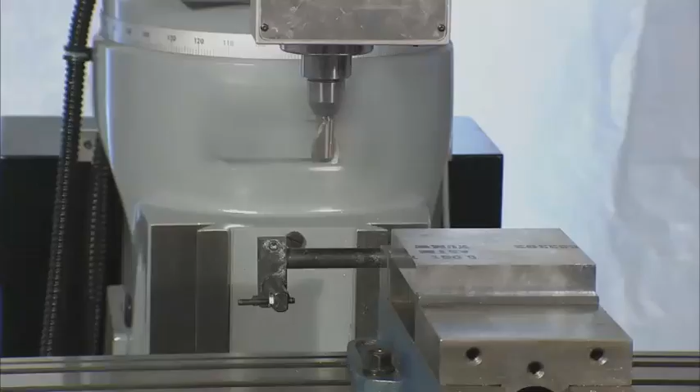It is always recommended to do a reference search when you first power on your machine. From the main jog screen, press the reference key. You will notice that a menu appears prompting you with possible options. Press the cycle start button to continue the reference search on all axes. Press the escape key at any time to cancel.

Another way of doing a reference search is to press the X key. Now press the reference key, followed by the cycle start button. This method allows you to reference search one axis at a time. You will need to repeat the process for all remaining axes.

Now that machine reference is complete, let's review our demo part print, required machining operations, and tools needed to program the demo part we have selected for this video. Please note, in our demo, we will be working in inch units of measure only. We will refer to all dimensions as inches or thousandths of an inch when entering print data to the 8055 control.

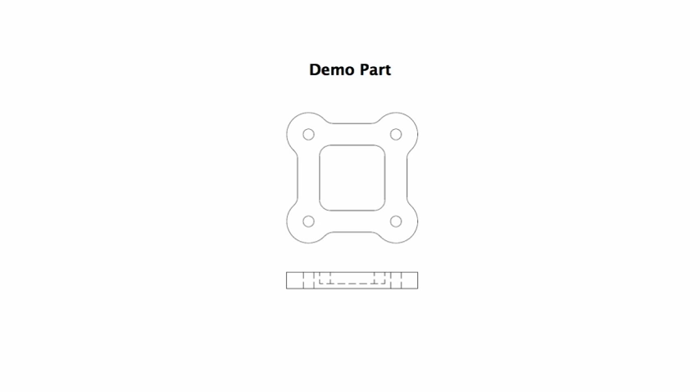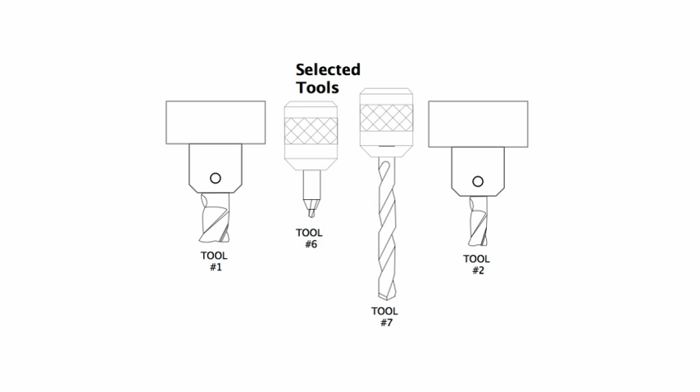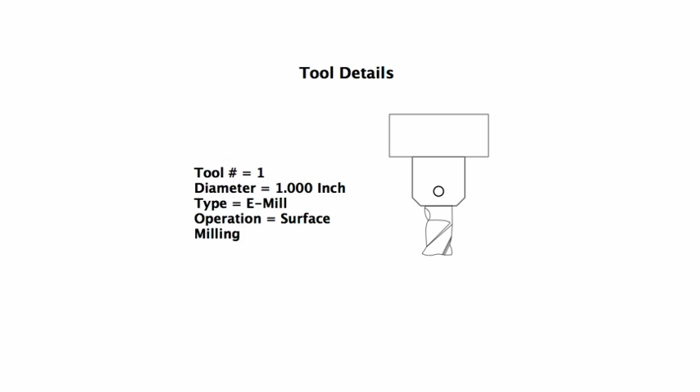Tool number 1 is a 1-inch diameter end mill, and we will be using this tool to surface mill our part surface. Tool number 6 is a 1/2-inch diameter spot drill, and we will be using this tool to spot drill all of our hole locations.

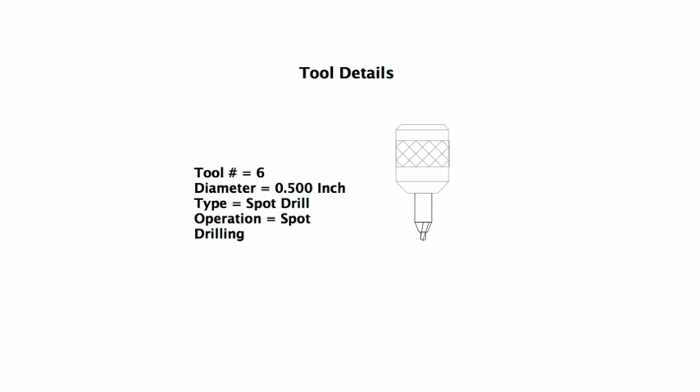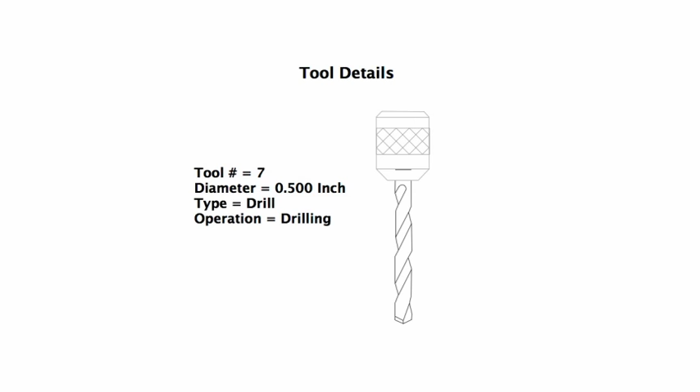Tool number 7 is a 1/2-inch diameter drill, and we will be using this tool to drill all of our hole locations. Tool number 2 is a 1/2-inch diameter end mill, and we will be using this tool to mill our outside profile and center pocket of the part.

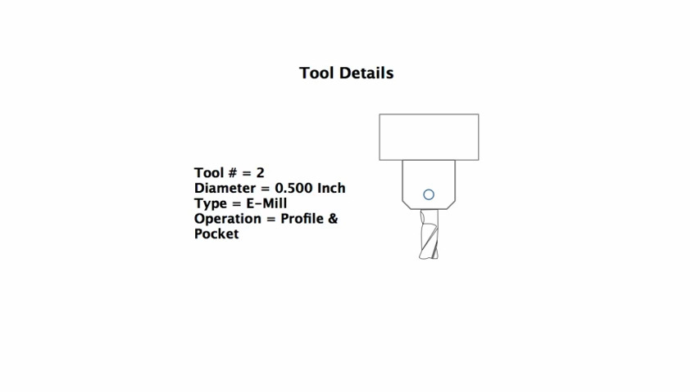Our raw material size for this job is 6 inches by 6 inches by 1 inch aluminum. We will grip 1/8 inch of the bottom surface in our work vise so we can machine as many continuous steps without removal or flipping of the workpiece.

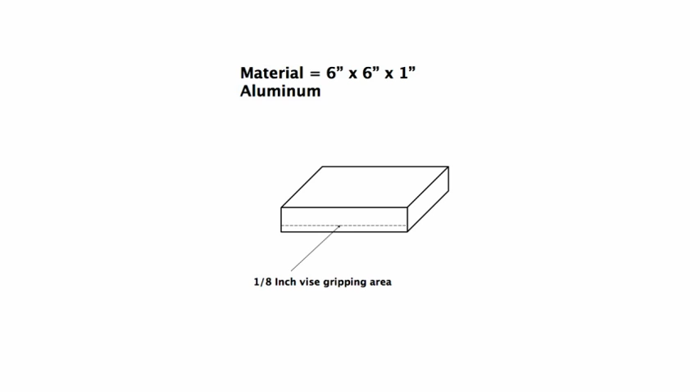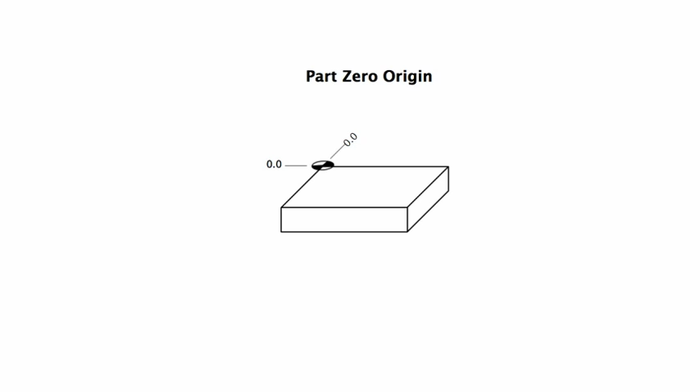After mounting the workpiece in a machine table vise, we will then establish our X and Y part 0 origin. In our demo, we will set the left rear corner as specified by our part print. After the X and Y part 0 has been established, we will then advance to the tool setup procedures. Tool 0 reference to the part surface and radius of the tool will need to be set.

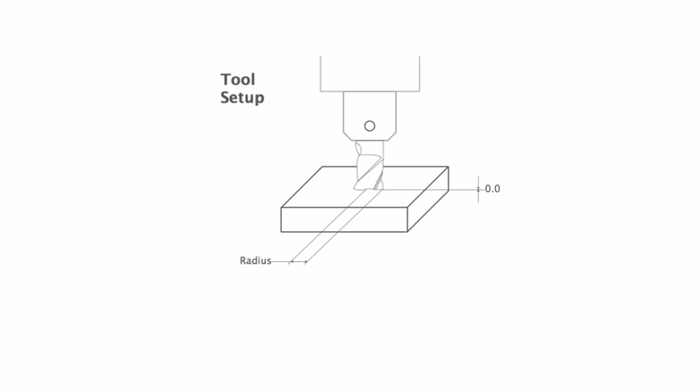Once the machine setup has been completed, we will begin our programming for the first operation and then machine that operation to completion. Shown here is the surface milling operation. Our selected tool for this operation is tool number 1. We will use a 1-inch diameter end mill to remove a small finished cut of material from the top surface. This will produce a clean, parallel, flat surface needed for continued tool calibrations and part measurements. When completed, we will establish the remaining Tool 0 references to this new part surface that has just been machined.

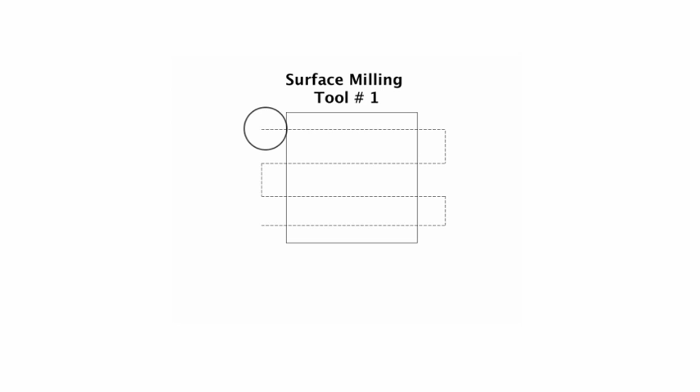In our second operation, we will be spot drilling holes to precision pattern locations. Our selected tool for this operation is tool number 6. We will use a 1/2 inch diameter spot drill to drill 5 shallow holes. Note, spot drilling or center punching is a great way to establish a guide hole that a longer drill will later follow without wandering off location.

After all spot drilling is complete, we will then move to our third operation of drilling 4 perimeter holes. Our selected tool for this operation is tool number 7. We will use a 1/2 inch diameter drill bit to drill through on our 4 previously spot drilled perimeter locations. Our fourth operation will be a simple drilling in the center of the part to a specified depth using the same tool 7. This will be our pilot hole for the pocket milling operation coming later.

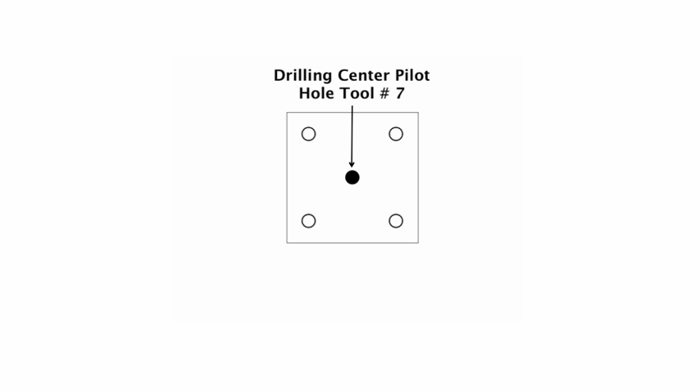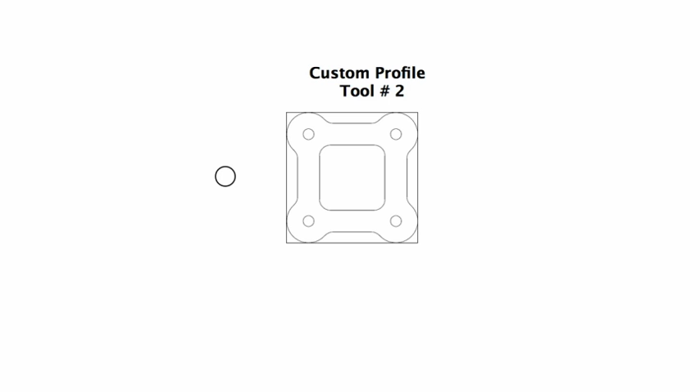After all drilling has been completed, our fifth operation is to custom profile the outside. Our selected tool for this operation is tool number 2. We will use a 1/2 inch diameter end mill with flute length of 1 inch. This operation will require the use of the Fagor profile editor to solve complex and missing geometry not given on our demo part print. Multiple depths of cuts will be required to complete this machining operation.

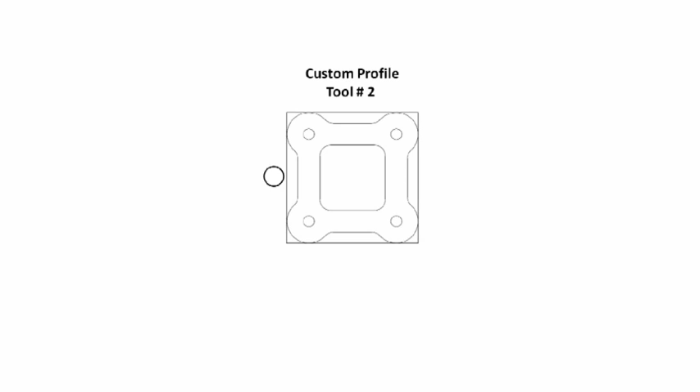After completing the profile, our sixth and final operation will be to mill the center pocket to length, width, depth, using the same tool number 2. This pocket operation will perform multiple step-over passes to clear the area as defined by our program.

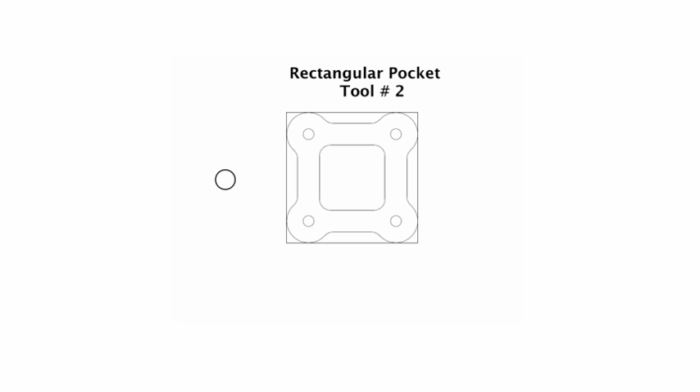This concludes our preview of the machining operations, tools, and programming steps we will be using in this video. Please feel free to rewind, pause, and review the previous information as needed before advancing further in this demo video.

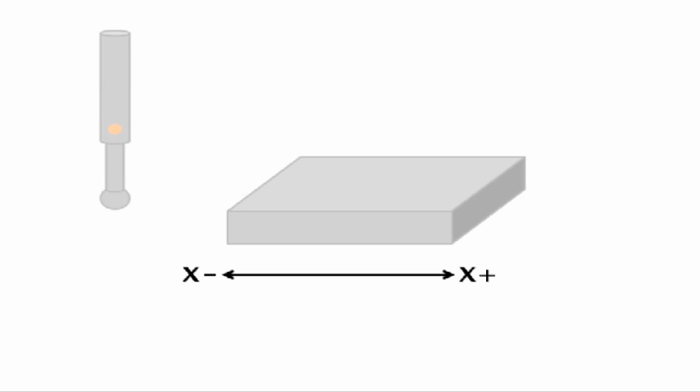It is now time for us to do our machine setup. We will start with the calibrating of our X and Y axes part 0. In our example, we will use an edge finder with a stylus radius of 200 thousandths of an inch. Press the Escape key until we are on the main menu screen. Let's calibrate the X-axis first.

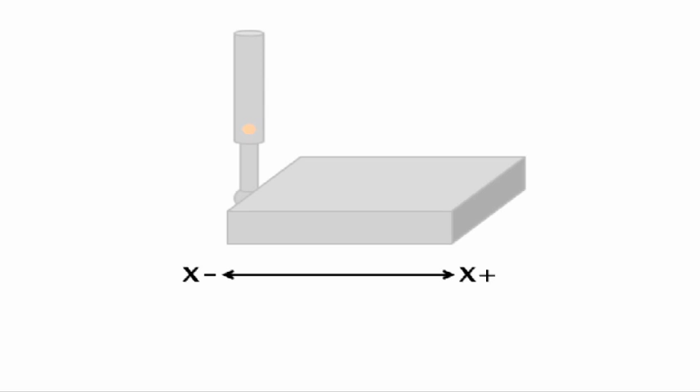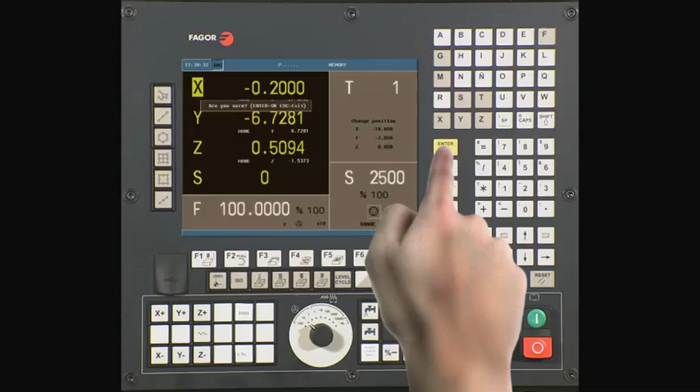Using the jog key or the hand wheel, jog the X-axis until you touch the part. Once the tool has made contact with the workpiece, press the X-axis key. Then type the radius of the tool as a plus or minus distance so the current tool's center is the proper distance from X0. In our example, we will type negative 200 thousandths of an inch and press Enter to activate the new X-axis part 0.

To calibrate the Y-axis, jog the Y-axis until you touch the part. Once the tool has made contact with the workpiece, press the Y key. Then type the radius of the tool as a plus or minus distance so the current tool's center is the proper distance from Y0. In our example, we will type positive 200 thousandths of an inch and press Enter to activate the new Y-axis part 0.

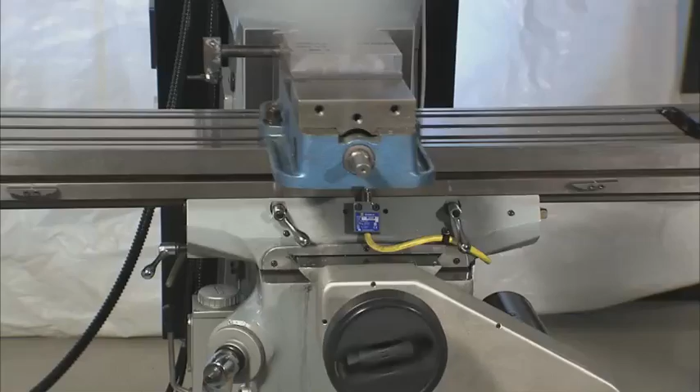The final machine setup step is to calibrate the tool. In our example, we will calibrate tool number 1. Press the tool calibration key. Select the tool you want to calibrate by pressing the T key followed by the tool number 1 and press the cycle start button to execute.

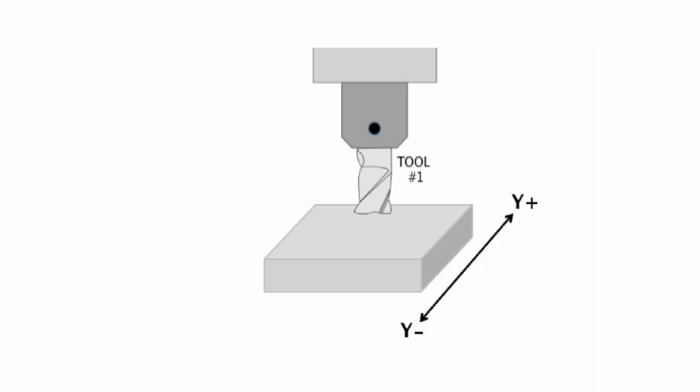The axes should now move to the tool change position. The CNC will dwell and wait for you to finish the tool change. When done, confirm the tool change is complete by again pressing the cycle start button. The CNC now updates the active tool on screen and we can continue. Next, using the jog keys or the hand wheel, jog tool number 1 to the top of the part surface.

Once touching the top of the part, press the Z key, followed by the Enter key. The CNC will measure and update the L value on the control. L is the tool length. K is equal to any tool wear. At this time, there's no need to define K, arrow down to continue.

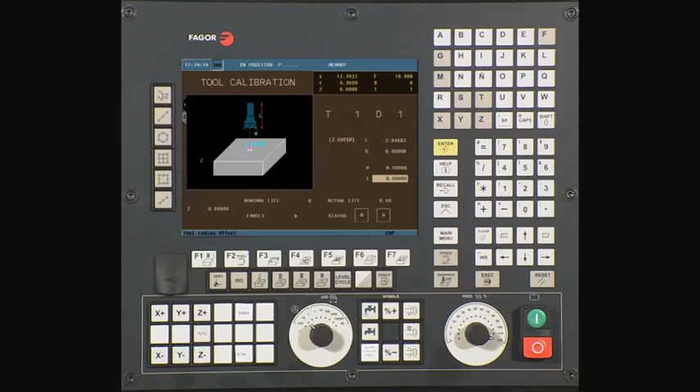R is the radius of the tool. In this example, tool 1 has a radius of 0.5 inch. I is any radius wear on the tool. At this time, we will leave it blank. The bottom half of the screen does not have to be defined at this time.

To confirm that we have done a proper machine setup and everything has been calibrated correctly, jog the Z-axis up until we are clear of the part. Now press the ISO key. Type X0, Y0, and press cycle start. The X and the Y axis will now move to the part 0.

Now turn down the feed rate override to 0% and again press the ISO key. Type Z0 and press the cycle start. At this time, slowly turn up the feed rate override switch to approach the part surface with the tool. Note, please stop the command at any time by pressing cycle stop or returning the feed rate override switch back to 0 if tool collision with the workpiece is detected. If the tool length was calibrated correctly, it should look like this.

We will now save the part 0 to our 0 offset table. From the main menu, press the reference key twice to bring up the table. Select the G54 offset using the up and down arrows. Press Recall to update the table. Press Enter to save and activate the G54 offset data.

Note, in most machine setups, tools will have different calibrated lengths, but will all share the same common X and Y part 0 that you have already established. Press Escape to go back to the main menu. In this section, we will show you how to cancel and recover tool offsets.